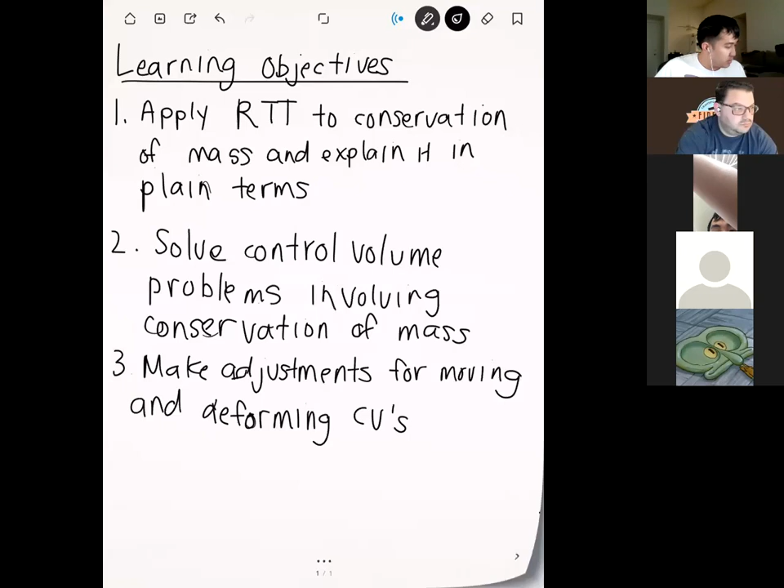This is control volume analysis part 1. What we're about to embark on right now, I think of as almost the real meat of fluid mechanics, at least the introductory one. Over the next few weeks we'll be spending time doing control volume analysis, and you'll see that we can actually apply this to a lot of really practical problems. Out of everything we cover in this class, this is probably the most practical in a lot of cases because it's flexible, you can apply it to a lot of things, and it's not as limiting as Bernoulli, even though Bernoulli is definitely very strong as well.

After that, we're going to go over what's called differential fluid analysis, where we'll cover a couple topics that form the backbone for more advanced fluid mechanics analysis if you go beyond this class. But we're going to start with control volumes. The whole basis of control volume analysis is the topic we covered last Monday before the midterm, which is Reynolds transport theorem.

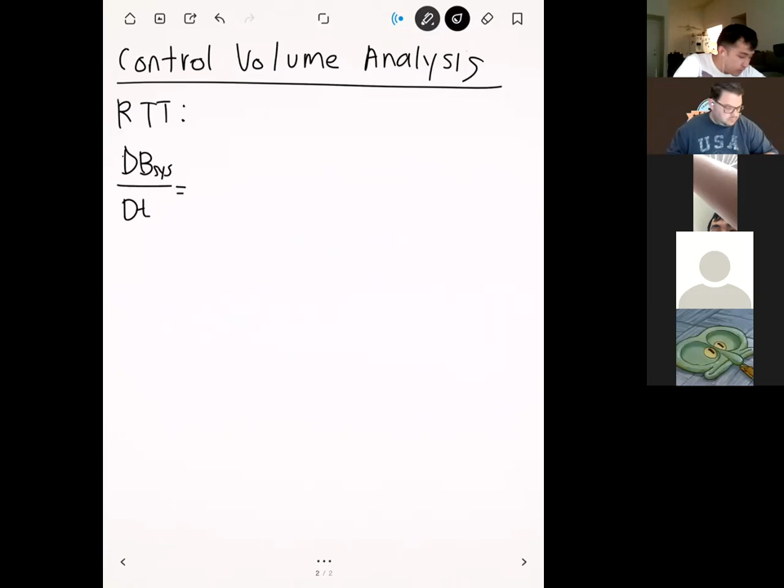If you recall, Reynolds transport theorem, shortened as RTT, is given by this: it relates the rate of change of a quantity within a system to its rate of change within the control volume. So we have dB/dt, and this is equal to the time derivative of the integral of rho little b dV, plus the integral of rho b u dot n-hat dA, over the control volume and control surface respectively. Remember from this expression, big B is our extensive property, and an extensive property is something that depends on the amount of mass in the system.

Little b right here is the corresponding intensive property. The way that we obtain little b is we just take big B and divide it by the mass.

Each of these terms here has a kind of plain language or intuitive definition. This first term right here is the production or generation term. If there's any way for our extensive property to be generated within a system, that's going to be reflected in that term.

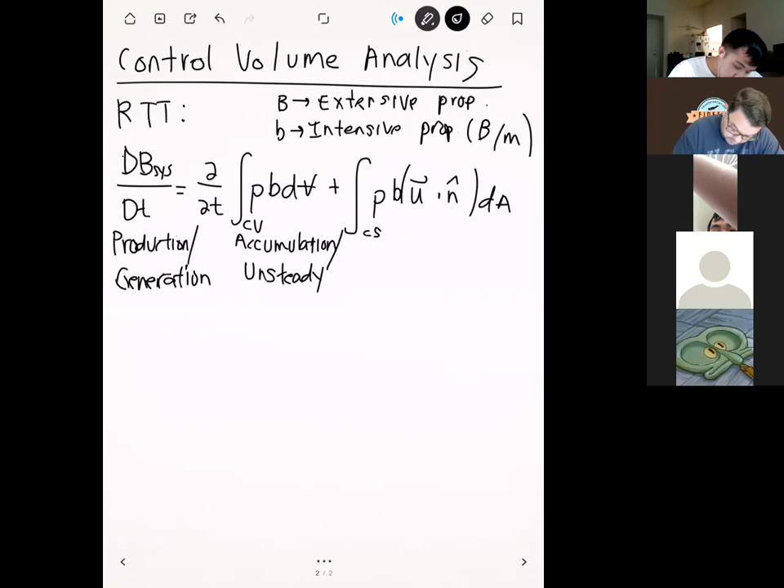The last term right here is our inflow and outflow term. Since our fluid is going to be moving through our control volume, this reflects the fact that our quantity can move with the fluid and it can come into the control volume at an inflow and it can flow out at an outflow too.

The next 4 lectures are basically going to follow the same format. We're going to start with RTT here. This is our most general form of RTT. Then what we're going to be doing is applying this to different extensive quantities.

The list of quantities that we're going to apply this to isn't just a limiting list. You can definitely apply this to a lot of different things, but just for this class, we're just going to go over the big 4 here. We're going to do mass. So that's what we're going to do today.

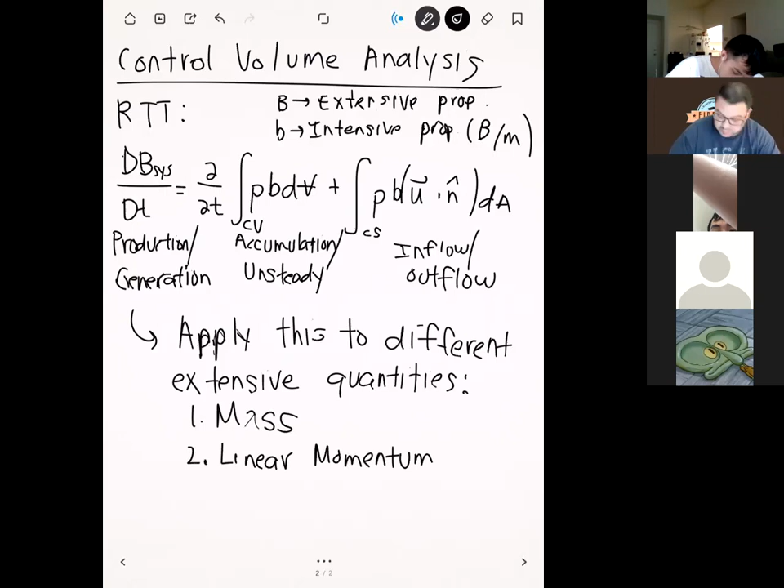Next, on Wednesday, we're going to do linear momentum. Next Monday, we're going to do angular momentum. And then next Wednesday, we're going to do energy.

Today we're just going to introduce the concept of applying RTT, and then we're going to do that same process over and over again. But mass is probably the most important one because it affects just so much. Any questions on this?

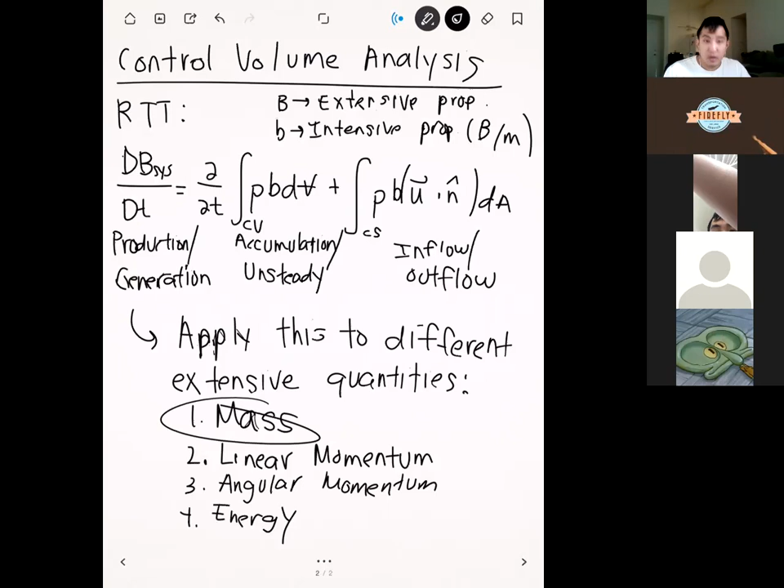Now let's apply RTT to conservation of mass and see how that changes our expression. For conservation of mass, what we're going to do is substitute. We're going to substitute for our B values, specifying them for this analysis.

Big B is just going to be mass. And then little b is just going to be 1. Because remember, little b is just big B divided by mass, and if we have mass divided by mass, then we just get 1.

The first thing that we always evaluate before we write out the full RTT is what does our production term look like? What is our generation term? In this case, our production term looks like this.

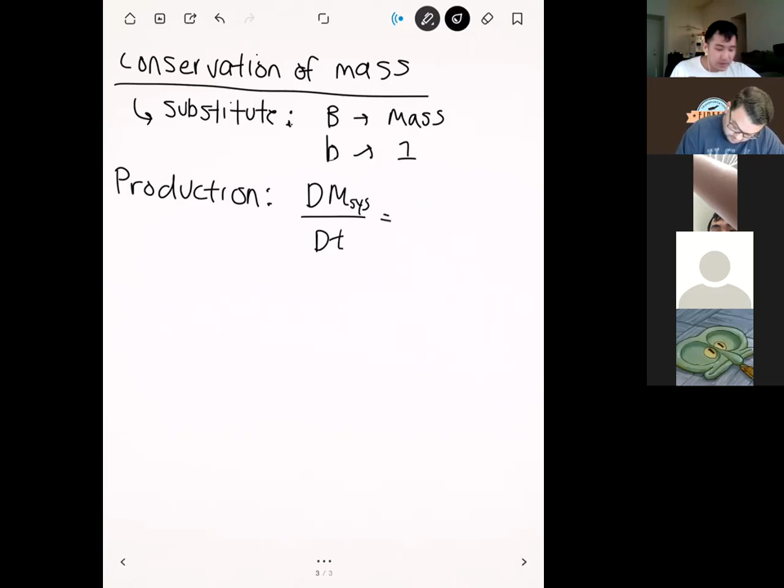If we substitute mass in for big B, we have dm_sys/dt. Just by conservation of mass, we know that if we have a fixed amount of mass, that's what a system is. Remember, a system defines a fixed amount of mass. Within a fixed amount of mass, we can't produce or destroy any mass within that fixed amount of mass.

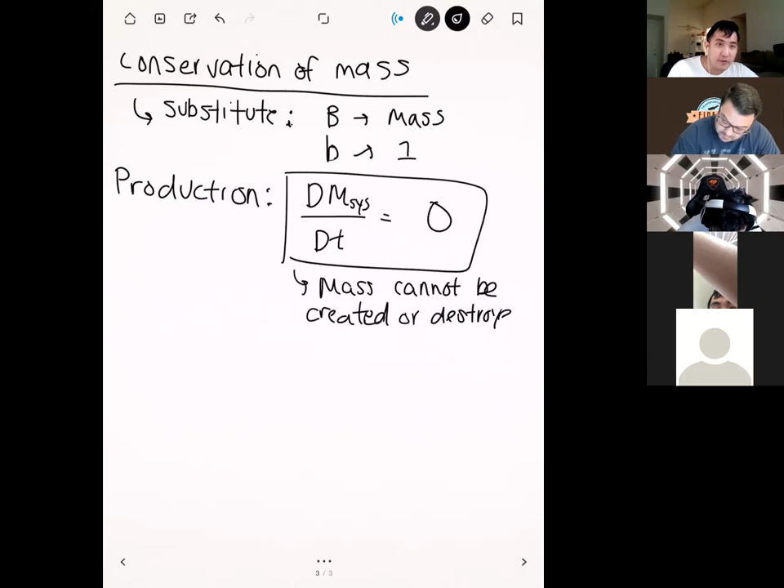So the dm_sys is the fixed amount of mass on the system? Yes, m_sys is the fixed amount of mass on the system. And d/dt is kind of like the rate of change of that mass.

If we apply that, and then we let little b equal 1, then we get the following expression. We get 0, because we just said that this term is 0 right here. Then we have partial derivative with respect to t

of rho dV, plus the control surface integral of rho u dot n dA. And so this right here is RTT for mass.

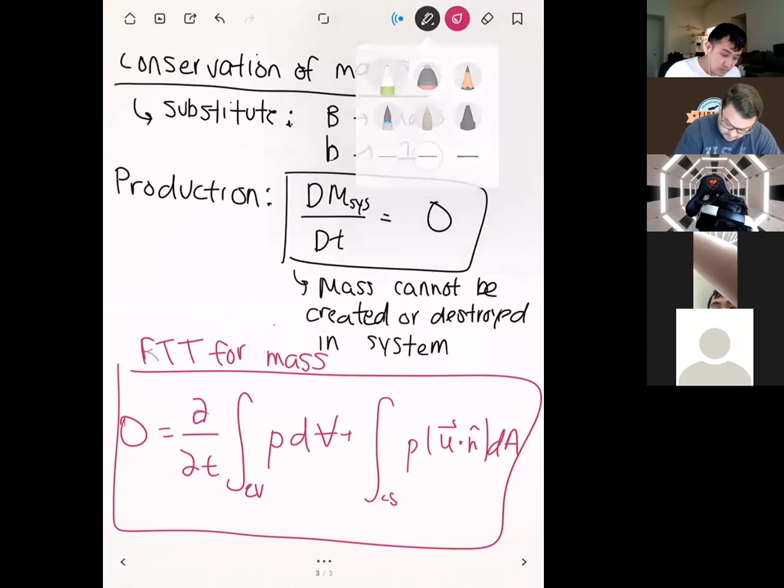Even though we've plugged in for mass here, all the terms have the same interpretation. That first term, our unsteady term, you can think of as the accumulation of mass within our control volume. And the second term is going to be our inflow and outflow of mass into our control volume. Any questions on this?

So that's the formula expression that we're going to start applying to examples. But I think it's also helpful to take that equation and state it in just plain language.

Stated in plain language, basically we can say that the only way for mass to accumulate or decrease within a control volume is for there to be a net inflow or outflow from the control volume.

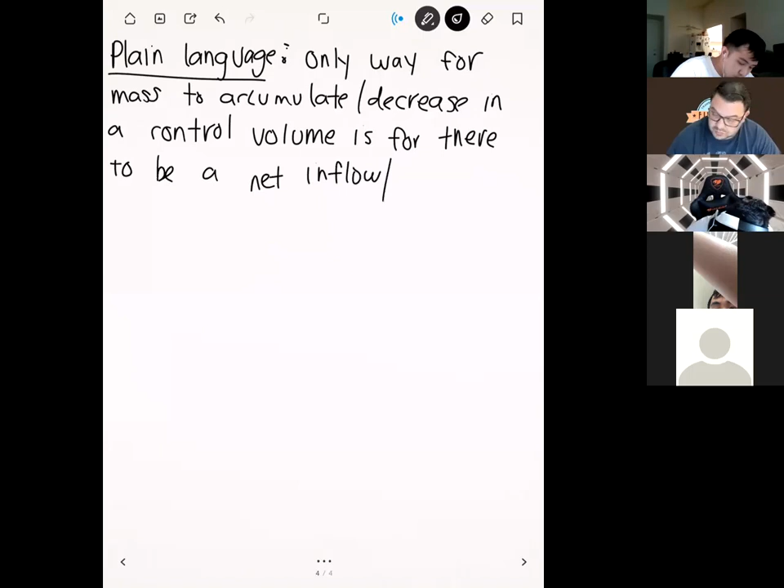Just a quick mental example you can think of: if you have a leaky bucket, the only way for water to accumulate in the bucket is for you to pour water in at a faster rate than water flows out. And by a similar token, the only way for the amount of water in the bucket to decrease is if it's leaking out at a rate faster than what you're putting in, and everything in between.

I know it's a scary integral expression, but that's all this is basically saying: this very intuitive thing that mass can only accumulate if we put it there, and mass can only decrease if we take it away.

So let's demystify some of the terms. First, let's look at the inflow and outflow term. To do that, let's start by recalling something we learned from Bernoulli, which is the expression for mass flow rate.

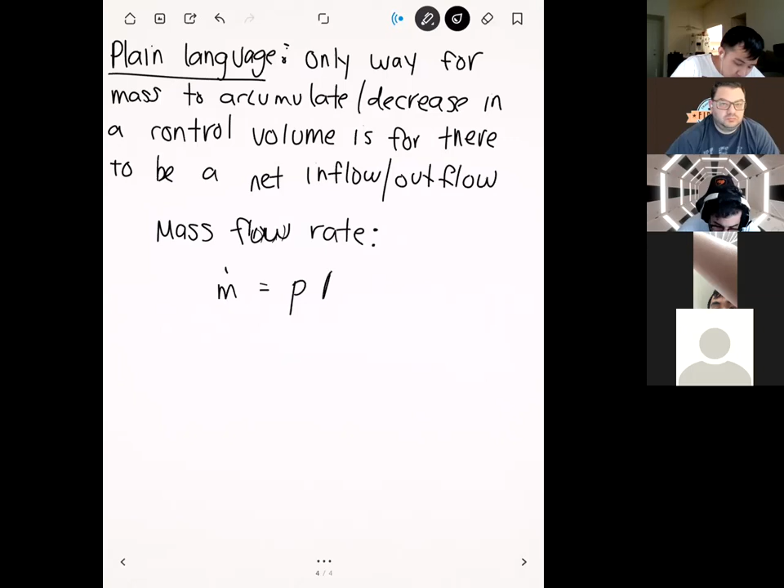Our formula for mass flow rate looked like this: we had an m dot, a rho, an a, and a u. If we go by dimensions, the dimensions for this will be mass over time. So to label these: this rho is our density, this a is area, and this u is velocity.

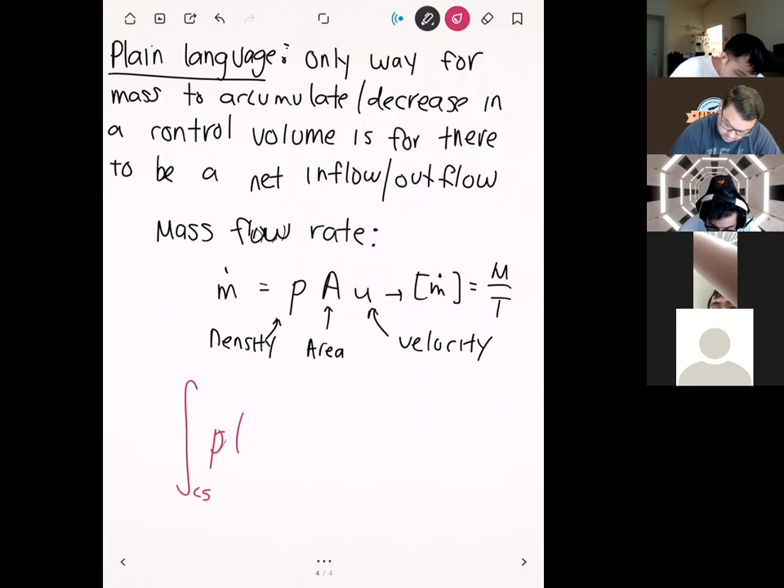If we compare that to our expression here, looking at the inflow and outflow term from RTT, we have the following: the integral over the control surface of density times u dot n dA. You can see from this integral expression we have the exact same terms: we have density, we have area — I know we have dA there, but once we perform that integral, the area just becomes a regular area — and then we also have velocity.

One other thing I want you to remember from last week is how to interpret this expression. Remember, this is a dot product of the velocity and the normal vector to our control volume. So in cases where u dot n... let me do it like this.

In cases when we're evaluating this integral at an inflow — remember, at an inflow velocity is going into our control volume, and our normal vector is pointing the opposite way — so at an inflow, we're going to make sure this is a negative quantity. Inflows have a negative velocity because the velocity vector and the normal vector point in opposite directions.

And then the opposite is true for outflows, where you have flow leaving your control volume, and your normal vector is pointing in the same direction. When you have those two vectors parallel with each other, this quantity u dot n is going to be greater than 0.

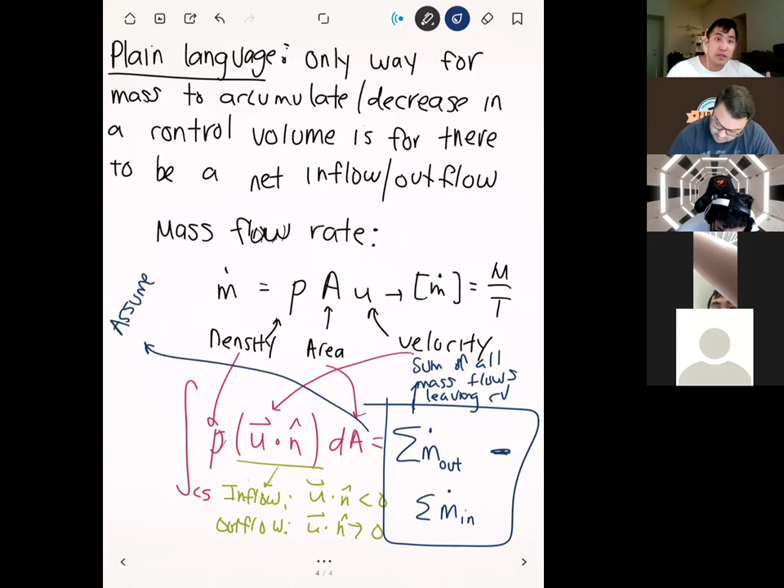I'll draw a picture to kind of illustrate what that exactly means on the next page. Before I do that, are there any questions on this page here? Okay.

So what do I mean when I say that the velocity is constant across the area? Let's just take a usual pipe flow. We have flow in a pipe, so we have fluid that's coming in through here. When I say that the velocity is constant, if we draw all the velocity vectors across this pipe, they're all going to be the same.

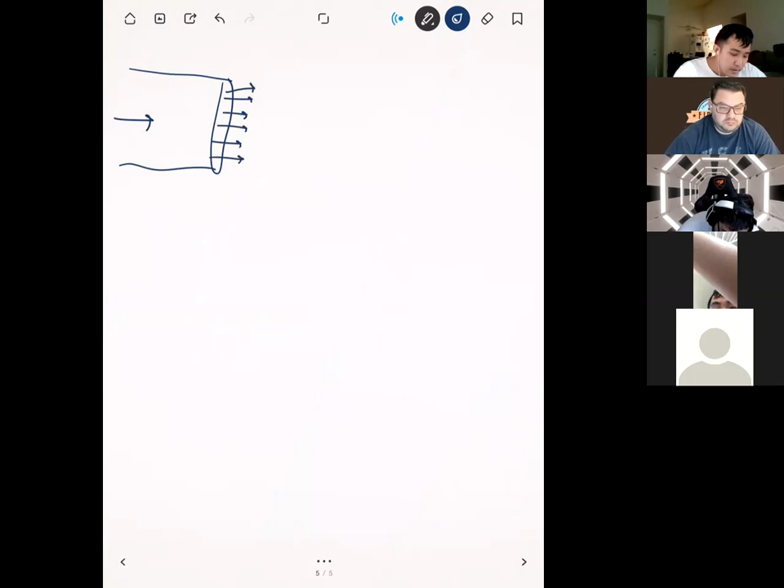And so when we evaluate this integral, we say that this is like u out. Most of the time we assume that the fluid has a constant density, so we can pull this guy out because it's incompressible. And since our velocity is also constant, equal to u out, we can also pull that out of the integral.

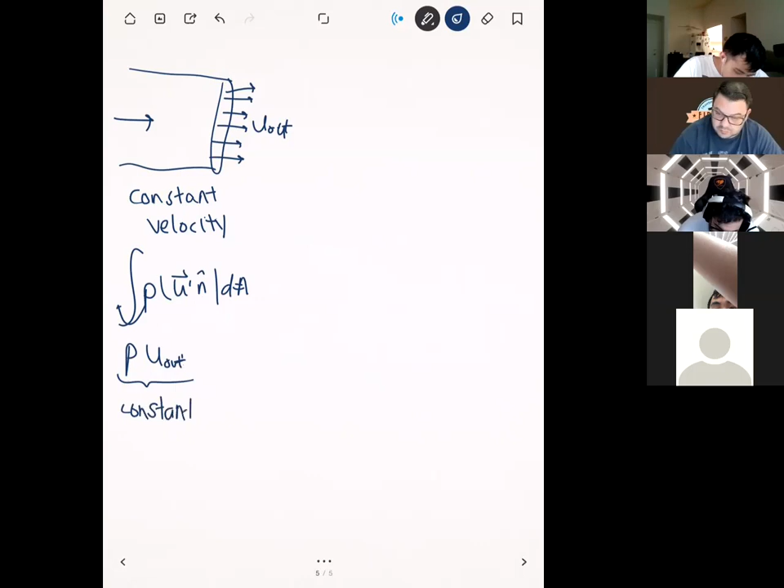Then all we're left with is just the integral of dA. When we simply integrate dA, we just get the area. And then we take the product of density times velocity times area, and we get m dot.

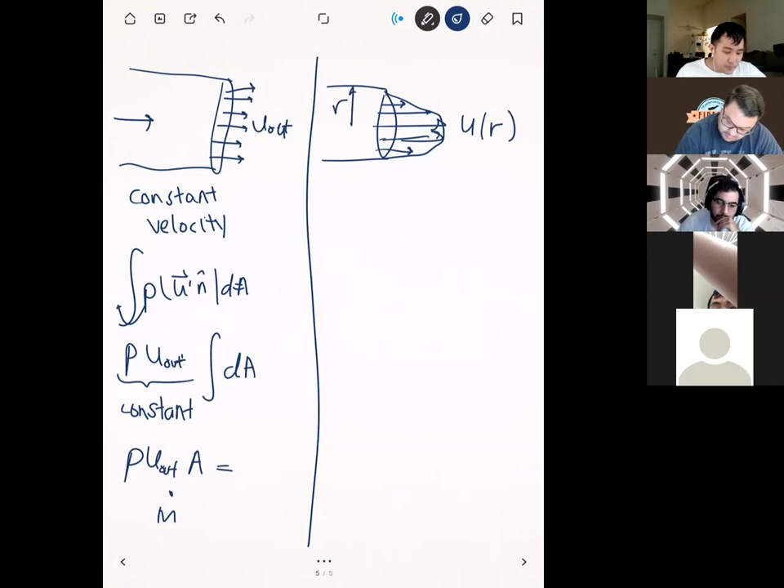We'll see this in a few weeks, but for right now we're not going to worry about it. But just for completeness, or if you're thinking about using this analysis for a real problem and you come across something like this, we're probably not going to use it in this class, but if you come across a situation like this, you can compute an average velocity.

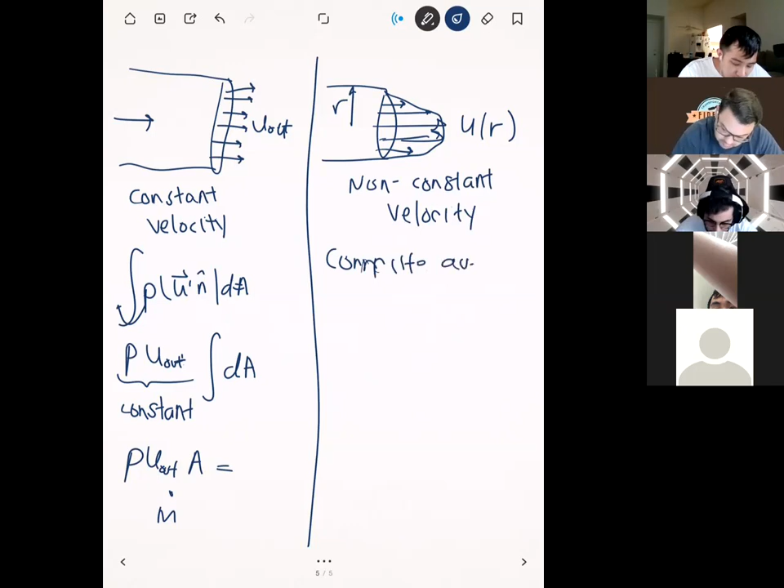So if you have a velocity, we call this a velocity profile, because it shows basically how the velocity in the fluid changes as a function of space. So if you're given a velocity profile, the way that you can compute an average velocity is you simply integrate it, and then divide by density times area. The average velocity, which we'll give the symbol u with a flat hat over its head, is equal to the integral of rho u dot n dA, divided by rho times A.

For this we're basically leveraging the average value theorem, or the midpoint theorem, from calculus. So we basically just integrate our entire expression, and divide by the scalar quantities we're not finding the average values for. In this case we're integrating velocity, density, and area, and then if we divide by density and area, we get the average velocity.

Again, for this class we're probably not going to use this all too much, at least not for 2.5 weeks. But I just wanted to show you guys how to deal with these kinds of problems in case you wanted to apply this to something you're working on for senior design or something else. Any questions on this?

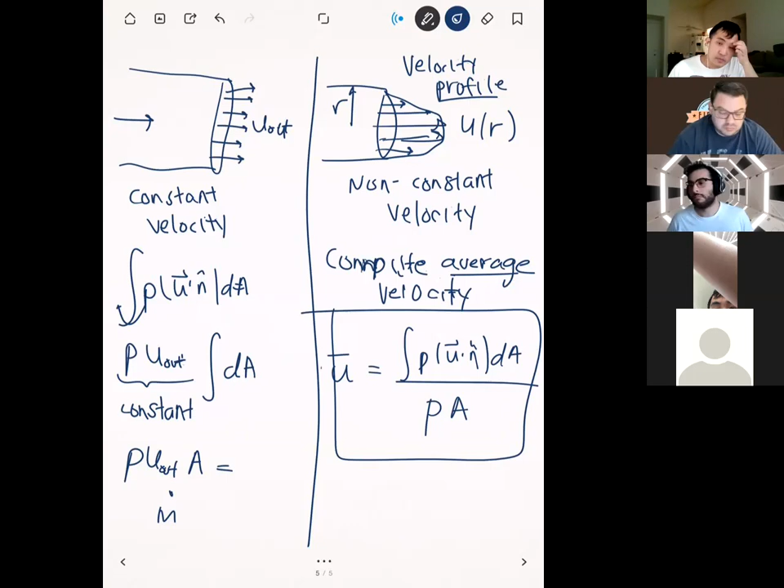Okay, so let's do some examples just to see how this works in reality. We're going to go over three classes of problems. The first thing we're going to do is go over examples where the control volume is fixed and doesn't deform. Then we'll do moving control volume problems, and if we have time, we'll go over problems where the control volume is actually deforming. So let's start with fixed control volume problems.

Okay, so in this example, let's say that we're designing the HVAC system for a confined space. Let's say you work for a workshop that does a lot of painting, like painting for metals or something like that. If you've ever worked with industrial strength paints before in a clean room, it's very important for air to be constantly circulating so that the paint particles don't float around and poison everyone. So for these kinds of systems, it's really important for air to be constantly circulating.

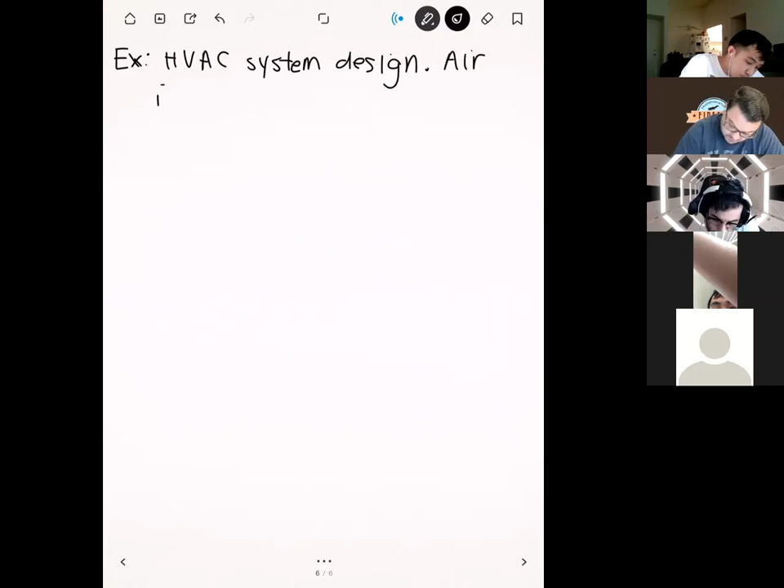So for this problem, let's say that the air within this room has to be completely replaced every 3 minutes. Okay, so that's our time window.

And so what we're going to need to do is find out how much air we need to pump into this room in order to satisfy this safety requirement. Let's assume our room is rectangular, like a box, just so we can compute the volume really easily.

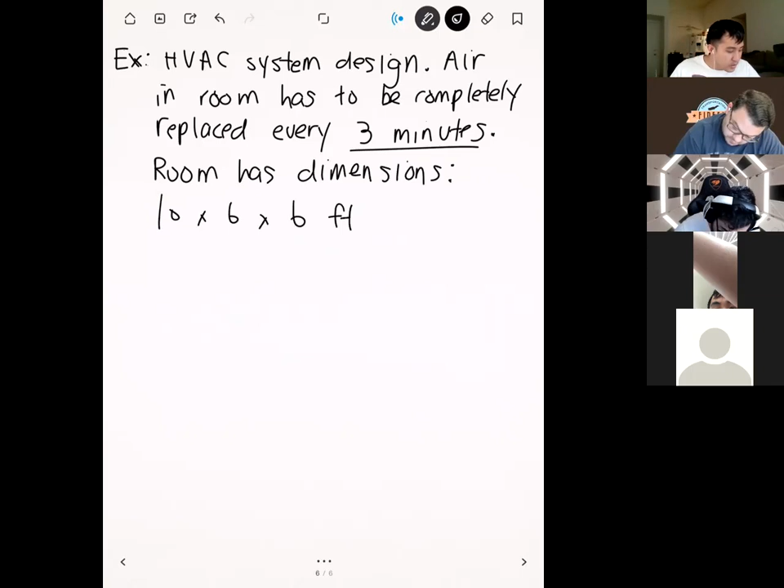Let's say that the dimensions of the room are 10 by 6 by 6 feet. So it's kind of a tiny room.

Okay, so let's draw a figure. Here's our room, and there's our person inside that we don't want to be poisoned.

And so to ventilate this room, let's say that we just have a single inlet and single outlet. Here we're going to have an inflow of air, so we have m dot in, and out here we're going to have an outflow, so we have m dot out.

Okay, and so we know the dimensions of these ports. Let's say that this is a cylindrical pipe right here, and it has a diameter of 8 inches. And at the outlet, we have a diameter of 4 inches.

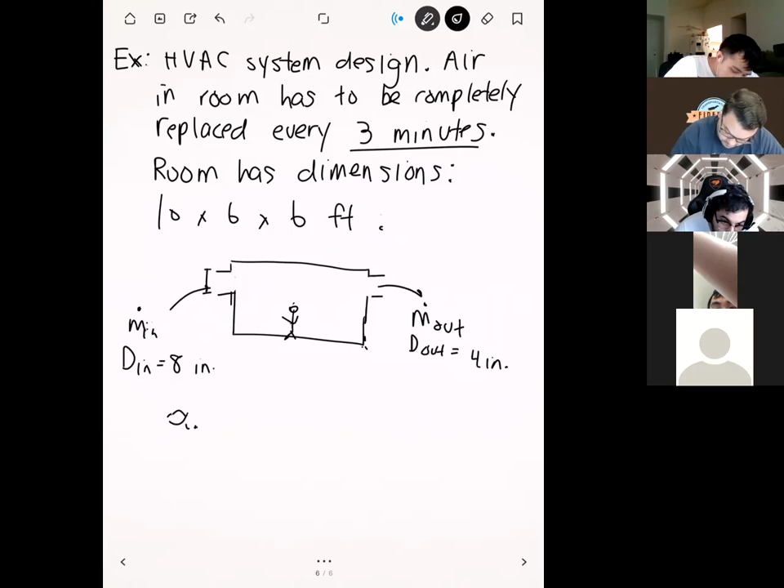And so we want to compute a couple things. First, let's solve for the volumetric flow rate of air. And the units we want to express this in are feet cubed per second.

And then next, let's compute the velocity, the air velocity at the inlets and the outlets. Okay, so that's our problem setup.

And so, before we do anything in these kinds of problems, the first thing we always need to do is draw our control volume. Remember, we went over a couple guidelines for that at the end of last class. But one other important thing that was implied, but maybe I should say explicitly: for this particular problem, we want to make sure that our control volume encompasses everything we want to analyze. For this problem, it's not too bad, because we have a room defined by a rectangular box, so all we have to do is make sure our control volume goes around our entire box.

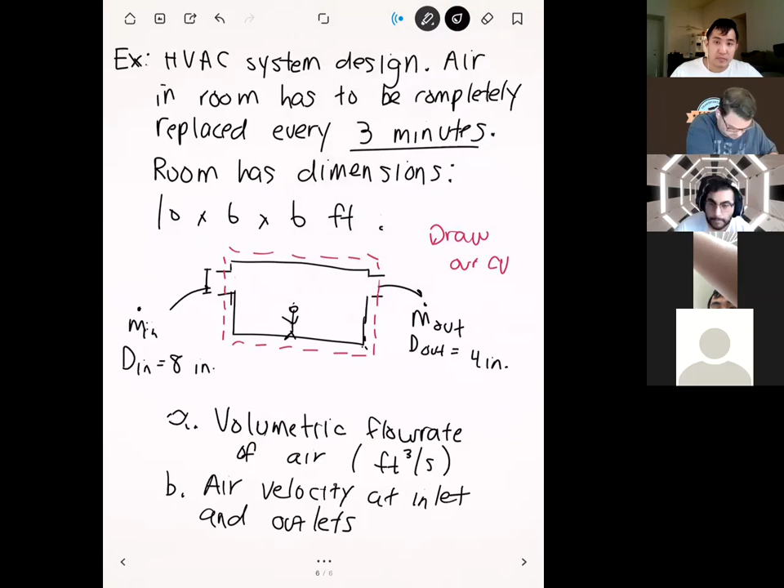Okay, so let's first compute the flow rate of air. First, let's compute the volume. The reason I use this symbol V with a cross through it to denote volume is just so it doesn't get confused with velocity. Usually volume in the text you'll see as a capital V, but when your writing is messy, it's hard to tell the difference between a capital V and a tiny v, so I do V with the cross on it.

And so the volume here is pretty simple. We're just going to take all the dimensions of our box and multiply them with each other. So you have 10 feet by 6 feet by 6 feet. We multiply all that together, we get 360 feet cubed.

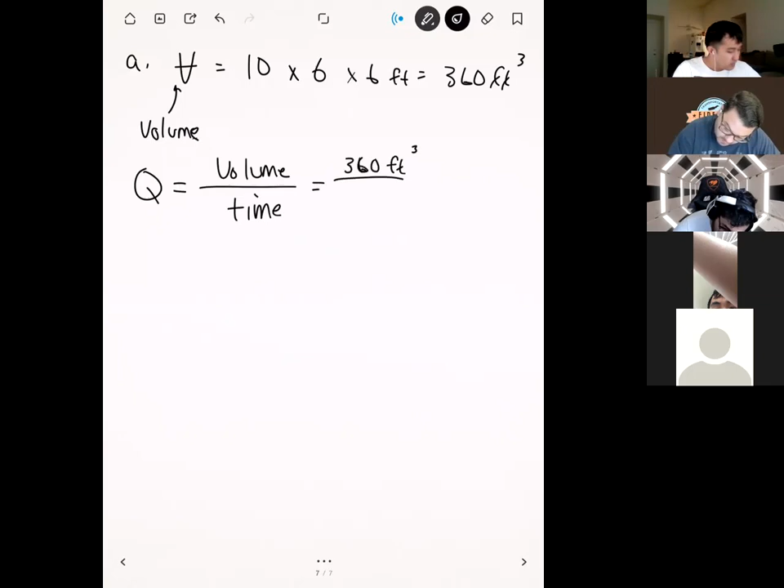Okay, so the volumetric flow rate. Remember what we said was that the air in this room has to be completely replaced every 3 minutes. So what that means is we have to put in a volume of air equal to the volume of the room every 3 minutes. Let's take the volume of the room, which is 360 feet cubed, and divide it by the amount of time we need to replace all this air, which is 3 minutes, or 180 seconds. Doing this division, we get 2 feet cubed per second. So when we're selecting a pump, or designing our HVAC system, we need to make sure that the flow rate of air going into the room and coming out of the room is at least 2 feet cubed per second, just to satisfy the safety guidelines.

Okay. Any questions on that?

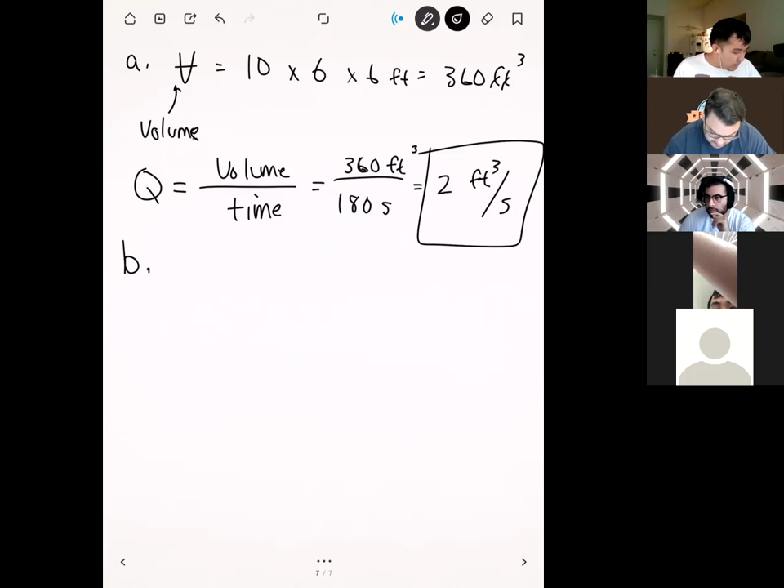So for this first part of the problem, we didn't have to apply RTT yet. We basically just used the parameters of the problem and went from there. But to solve for the average velocities, we're going to apply RTT. Let's go ahead and write down every single term. The way I want you guys to do these problems, even once you get practice, you can see from the beginning what terms will cancel out or not. But when we're starting out, I want you to write out the entire expression. You don't have to go from general RTT, but at least go from the place where we've already applied the big B and little b. Write out the entire expression and then cancel out terms from there, just so you don't miss anything, because sometimes it's easy to miss terms if you're not careful.

Okay, so there's our entire expression, and all this is equal to 0, because mass can't be created or destroyed. So the first thing we'll do is cross out the accumulation term. Just because it wasn't explicitly said in the problem, but we know that since this is something we're designing for a long amount of time, this HVAC system has to be running all the time and always has to be replacing the air. We can say this situation is steady, and we can cross out that first term. Anytime you have a steady situation, we can cross out that term, because we know no mass is accumulating in the system, therefore nothing is really changing with time.

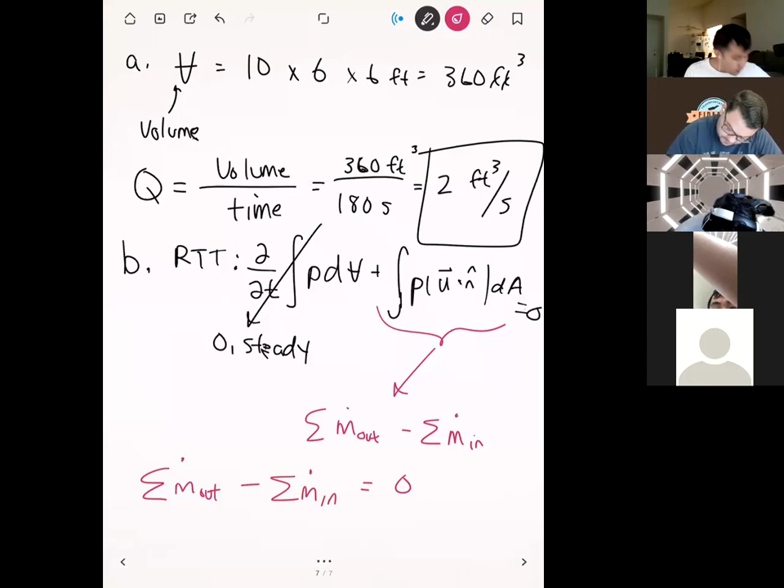From here, we can write our inflow outflow term into a form that's more convenient. So we can say it's equal to the mass flow in, which is equal to the mass flow out. If we rewrite this expression, we get m dot out minus sum of m dot flow in is equal to 0. In this case, we only have one outflow and one inflow, so let's replace these with their full expression. Sum of m dot out is simply density multiplied by u out times a out. And m dot in is rho, density rho, times u in, velocity in, times a in.

Any questions on this before I turn the page?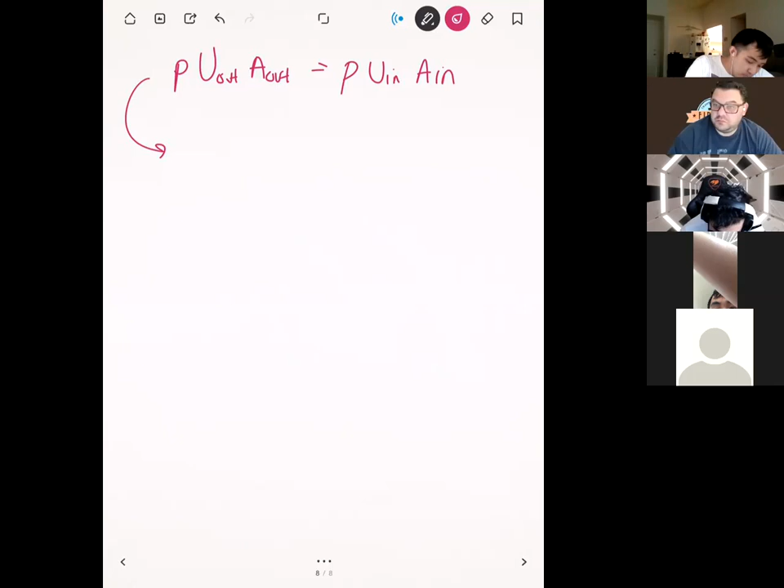At this point, we can simplify that expression. If we simplify this, we get rho, we just move it to one side, u out, a out is equal to rho, u in, a in. This actually gives us a really nice result, which tells us that when our situation is steady, like we have right here, then the amount of outflow has to equal the amount of inflow. So any air that we put into the system has to come out somehow.

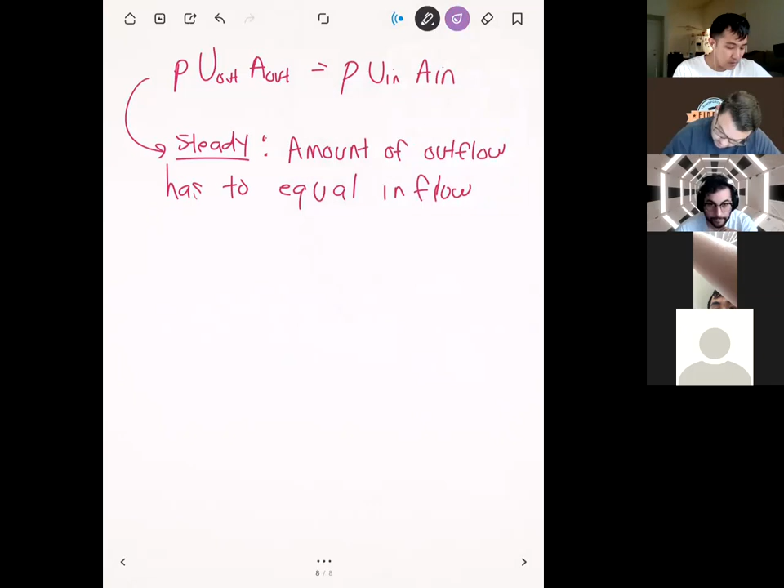And then what we can do from here is we can take the density and cross those out, because we have the same density on both sides, and we assume the flow is incompressible. And we get that u_out, A_out is equal to u_in, A_in. And then we know from our Bernoulli unit that the product of velocity and area is equal to Q, our volumetric flow rate.

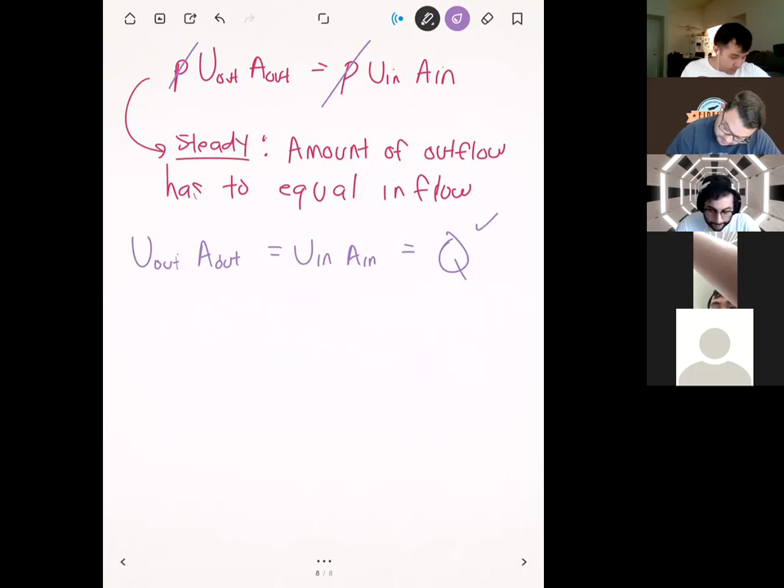And Q we've already solved for in this problem just from part A. Remember, part B of this problem asks to solve for the velocities at the outlet and the inlet. So let's use the fact that we know Q, and we can compute the areas because we're given the diameters of the two ducts, and then we can solve for u_out and u_in.

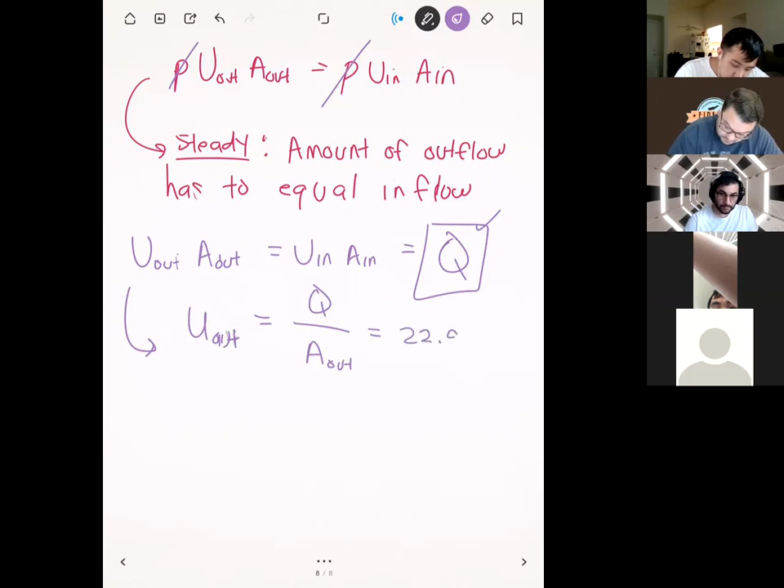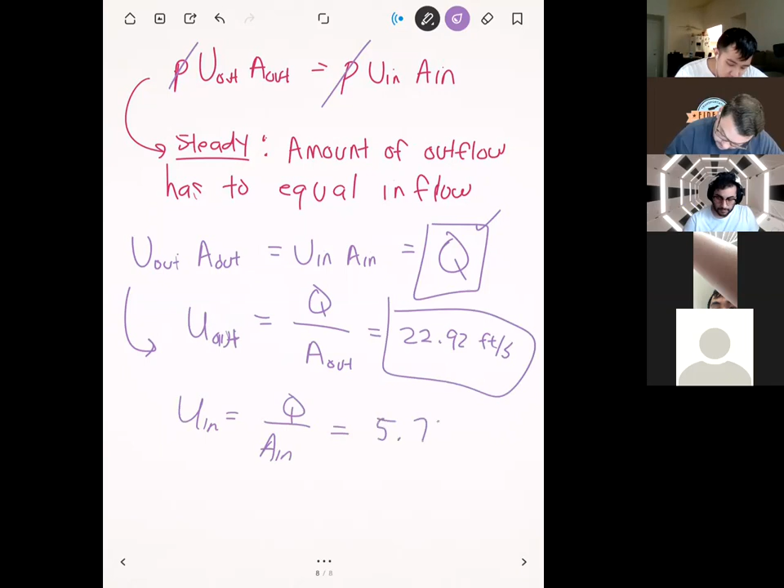So let's say we solve this expression for u_out, so u_out is going to be Q divided by A_out. If we compute the area and perform this division, we get 22.92 feet per second, so that's the outlet velocity. And then the inlet velocity is going to be Q divided by A_in, which is 5.73 feet per second.

So we can see here that the outlet velocity is significantly higher than the inlet one, and that's because our outlet pipe has a much smaller diameter, so velocity has to increase in order to maintain the same mass flow.

The reason we start with conservation of mass here is that we've already been talking about this a bit through Bernoulli. The RTT expression for conservation of mass a lot of times just breaks down to what we learned in Bernoulli, where mass flow in has to equal mass flow out. The only difference now is that we're working with a more general expression where we can deal with multiple inlets, multiple outlets, and actually unsteady situations, which is the next example.

All right, any questions on this?

So you're doing the area of our outlet stuff, are you taking like a cross sectional type area of that, like pi over 4 times d squared or something like that? Yes. So the area is always going to be whatever is the cross section for the flow, whatever area is perpendicular to the flow direction. You can kind of think of it as the area that the flow must cross in order to enter the control volume.

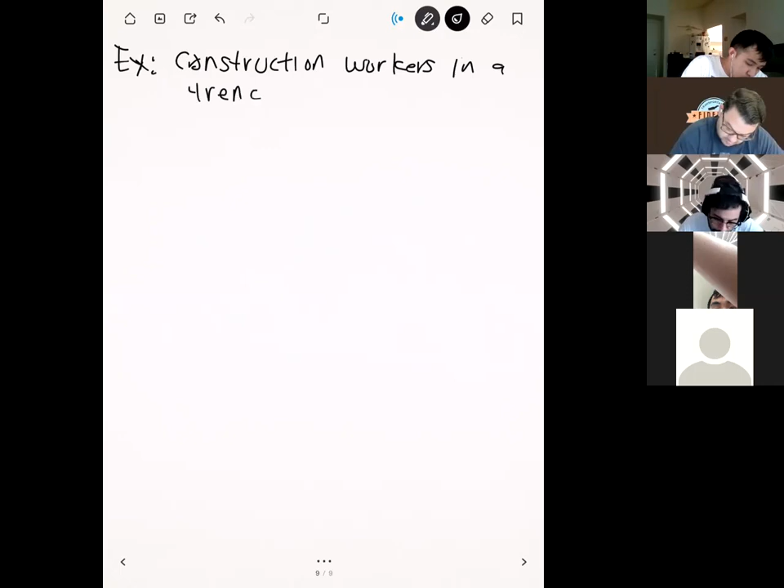So let's say that we have our trench that looks like this. We have our construction worker. I'll give him a hard hat because he's a construction worker. Let me make it orange.

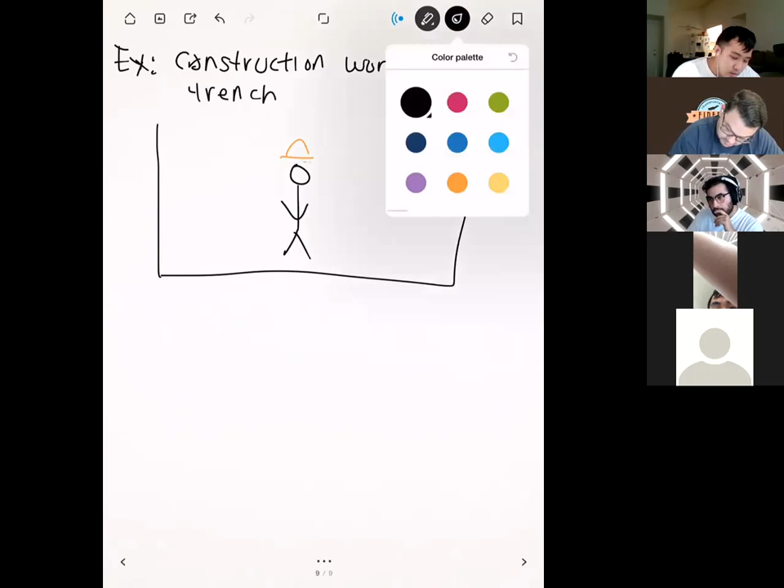There we go, for safety. So what tends to happen for these trenches that run alongside the road is that, because cars are constantly driving past, they're emitting a lot of stuff, but the main thing they're emitting is CO2, carbon dioxide that's constantly coming out of cars. And since CO2 is more dense than air, and we know from hydrostatics that a more dense fluid tends to sink, you constantly have this inflow of CO2 coming into the trench, just like this.

So what's done in a lot of practical cases, you might have seen these before, is that there's a hose that's actually inside the trench, that might look something like that. A lot of times these hoses aren't putting anything into the trench, what they're doing is actually sucking things out of the trench, sucking out the CO2 or other harmful gases that are in that trench, just to keep the workers in relatively good condition.

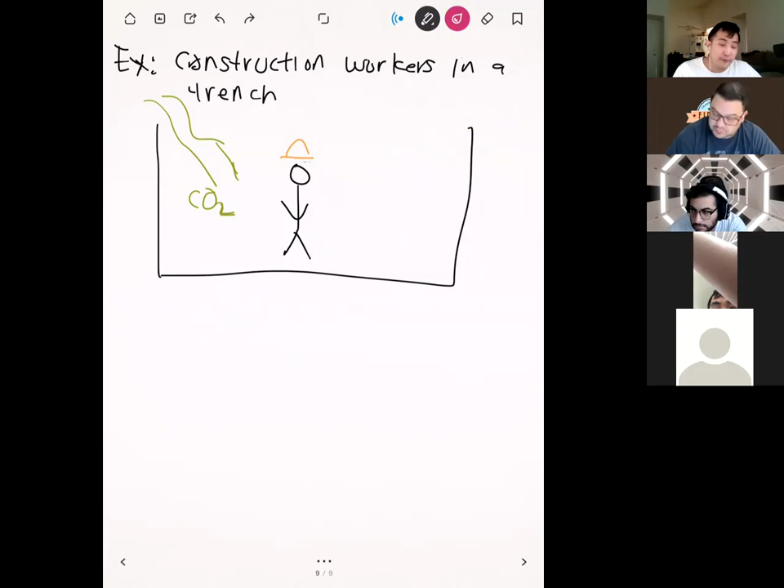But in this problem, we're going to pretend that we don't have the hose, so we have a very unsafe situation, and we want to find out at what point things are going to become unsafe for our worker. So just like before, let's draw our control volume. So our control volume will look something like this, it's just going to surround the trench.

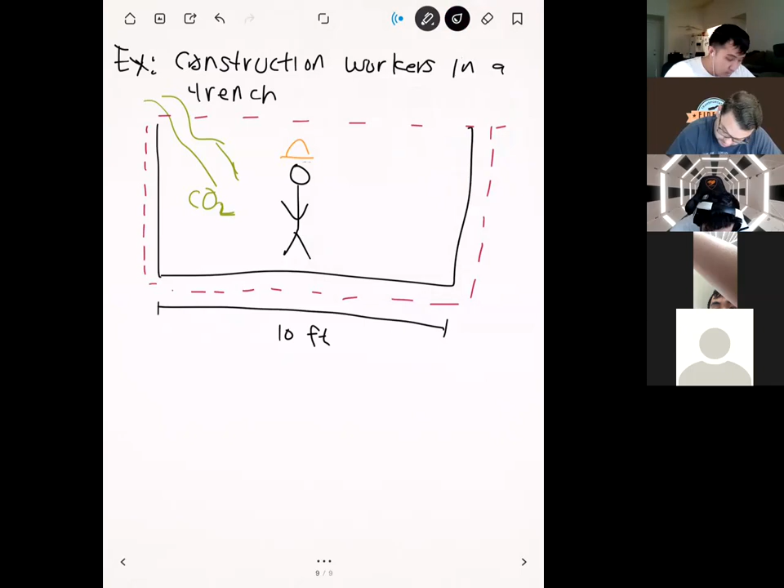Okay, let's give our trench some dimensions. Let's say this length right here is 10 feet, this dimension right here is 8 feet, and we'll also say it has a depth of 5 feet going into the page.

Let's solve for the following quantities. First, let's solve for the rate at which CO2 is entering the trench, or the rate at which the height of CO2 in the trench changes with time.

And in part B, the time it takes for the height of the CO2 to reach 6 feet.

The reason that number is significant is that it's kind of the average height of construction workers. This is important to know because, if you don't have proper ventilation, this is the amount of time workers can work in the trench before they have to circulate all the air out of there.

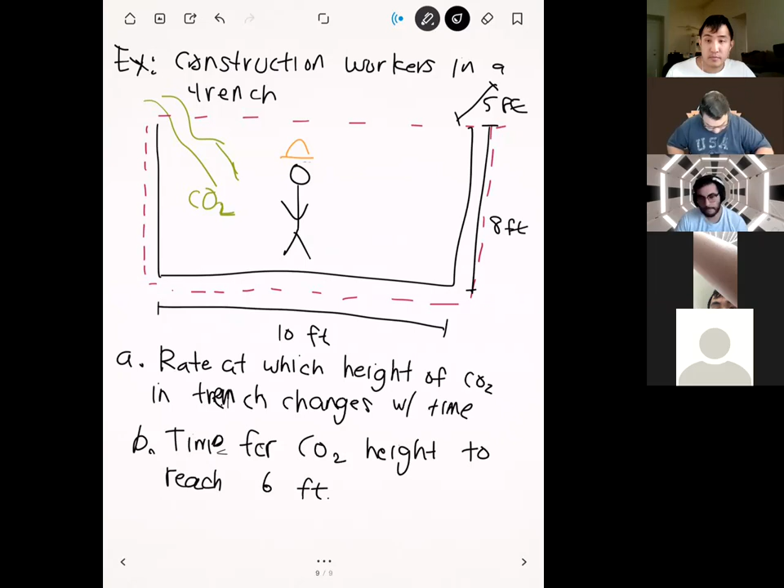Any questions on the problem setup? Okay, all right, so let's start with part A. We want to find out the rate at which the height of CO2 is changing within the trench. So let's apply RTT.

We're going to write out the entire expression. So we have 0 is equal to partial t of the integral of rho dV, plus the integral of rho u dot n dA.

Oh, I forgot to give one more thing for the problem. We need to know the actual inflow of CO2 into the trench. So let's say that Q in is going to be 10 feet cubed per minute.

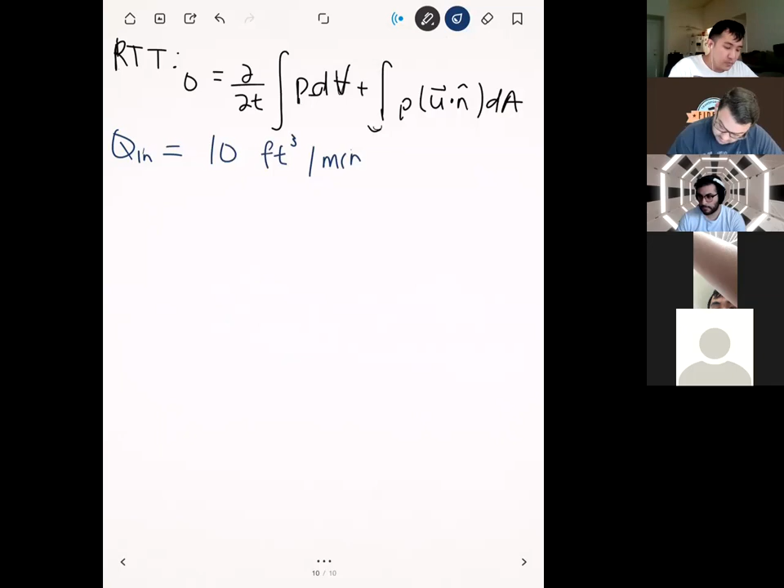And so in this particular problem, since we're saying that CO2 is accumulating within the control volume—let's assume we start with no CO2 in the trench, and over time CO2 enters and accumulates—since we have this accumulation, we need to keep this term right here.

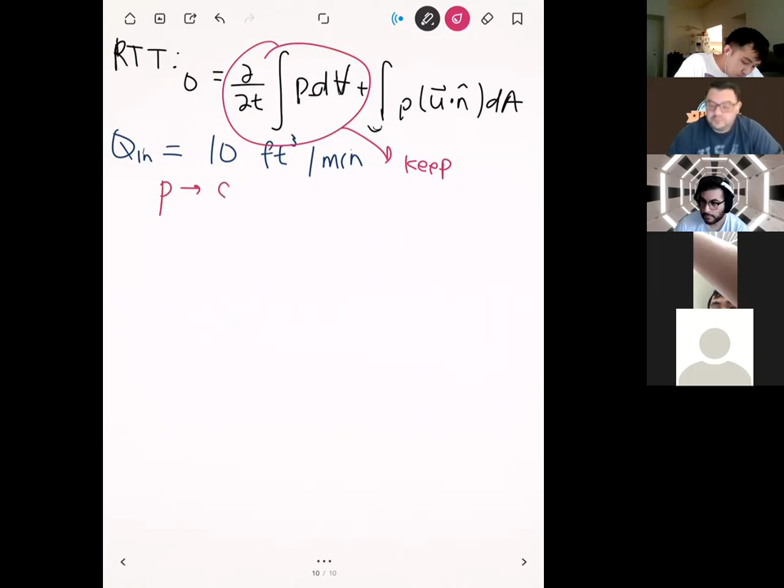Let's rewrite this expression and simplify it a little bit. First we'll apply our usual assumption that the density is constant. So if we have a constant density, we can pull it out of the integrals, and we get 0 is equal to rho partial t of the integral of dV.

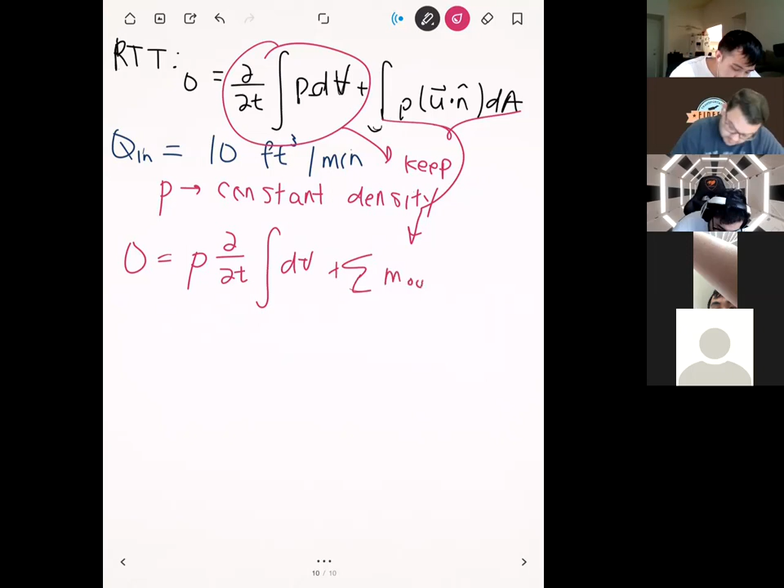Then let's replace this expression with the one we know in terms of mass flows. So we're going to have the sum of all the mass flows out minus the sum of all the mass flows in.

First we'll cancel out the outflow term, because we're saying the CO2 is just accumulating within the control volume, so there's no hose sucking the CO2 out.

If we evaluate this integral, it's just the integral of dV, so that's just the volume. If we apply the time derivative of that, we simply get 0 is equal to rho dV/dt minus m dot in. So we just have one inflow in this case, and our inflow is given by this volumetric flow rate, so it's density times Q in.

Next we're going to cancel out the densities, because density is constant, so we can just pull it out and subtract. We get dV/dt is equal to Q in. So what we're saying is that the rate at which the volume of CO2 is changing within the control volume is equal to the rate at which CO2 is entering the control volume. Intuitively, that makes a lot of sense.

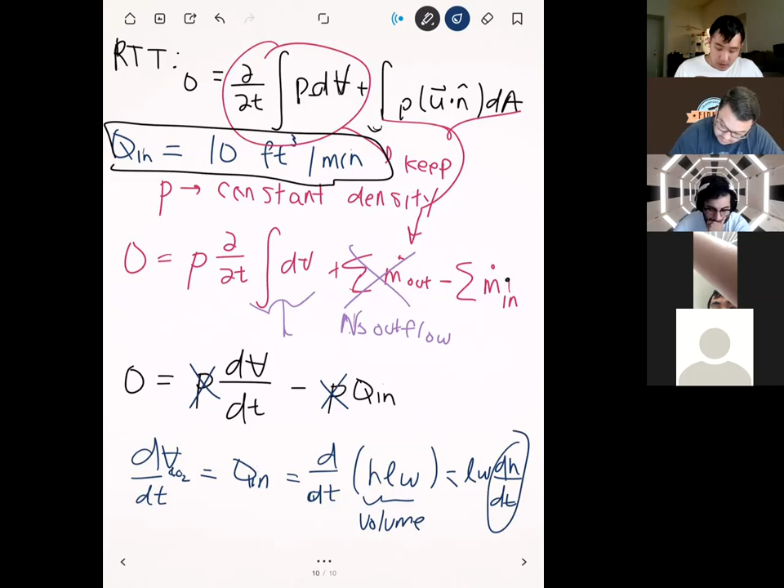Okay, so if we solve this expression for dH/dt, we get dH/dt is equal to Q in divided by the length and the width.

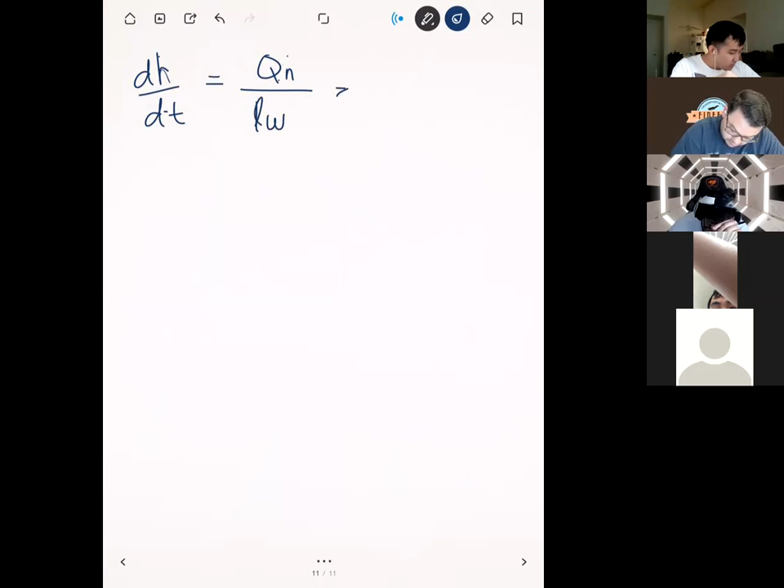And so if we plug in all the numbers, because we have all of them from the problem, we get 0.2 feet per minute.

So if we dig this trench in the middle of the night, when no cars are running, and then as soon as cars start driving past, the height of CO2 in that trench is going to be raising at 0.2 feet.

And so now that we have the rate at which the height of CO2 is changing within the control volume, we can compute the time. Remember, we want to compute the time it takes for the height of CO2 to reach 6 feet.

All we're going to do is take 6 feet, divide it by the rate. So you have 6 feet divided by 0.2 feet per minute. The feet cancel out, and we get 30 minutes.

So if we start with basically an empty trench, no CO2 in there, and we start building in the dead of the night, then as soon as cars start going past, workers can only work in there 30 minutes before it starts to get really dangerous and they're drowning in CO2, which is obviously not good.

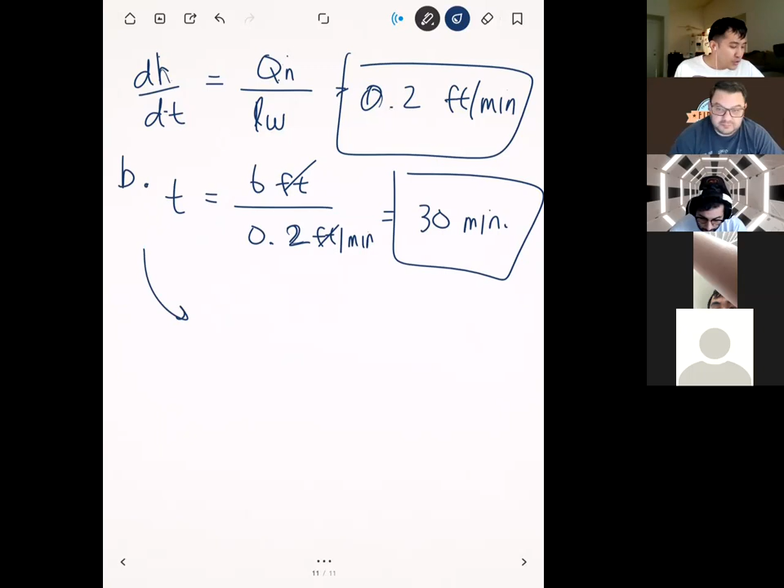The big reason I wanted to do this problem, first of all, was to give you guys a taste of how you do unsteady problems. But also to highlight the general fact that when you have an imbalance of inflows and outflows—and that's exactly what we had in this case—we had an inflow of CO2 but no outflow. We're just putting fluid in, but none of it's coming out.

And so when you have this kind of imbalance, this leads to accumulation. In this case, accumulation of fluid within the control volume, or the opposite can be true, where it can lead to a decrease in fluid.

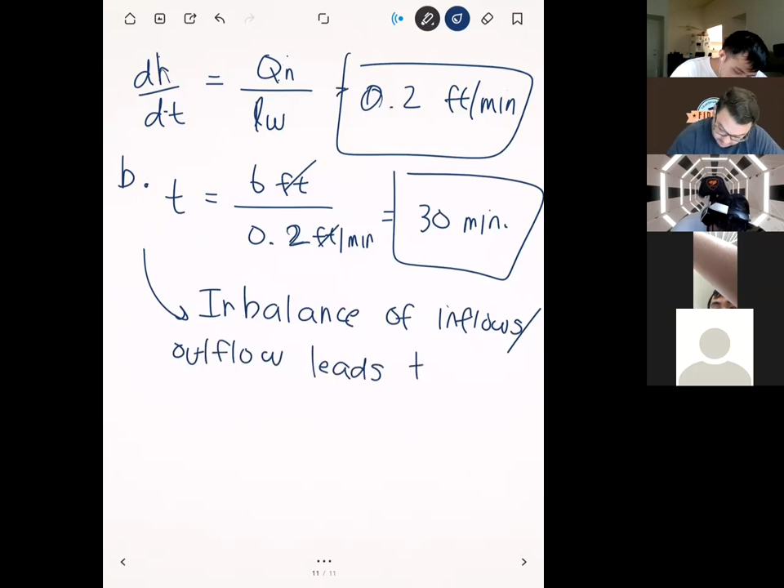Or in other words, the term you'll see most often is that this leads to unsteady situations. An imbalance of inflow and outflow will lead to these unsteady problem-solving situations. So those are two examples: one for a fixed problem, one for a steady problem, one for an unsteady.

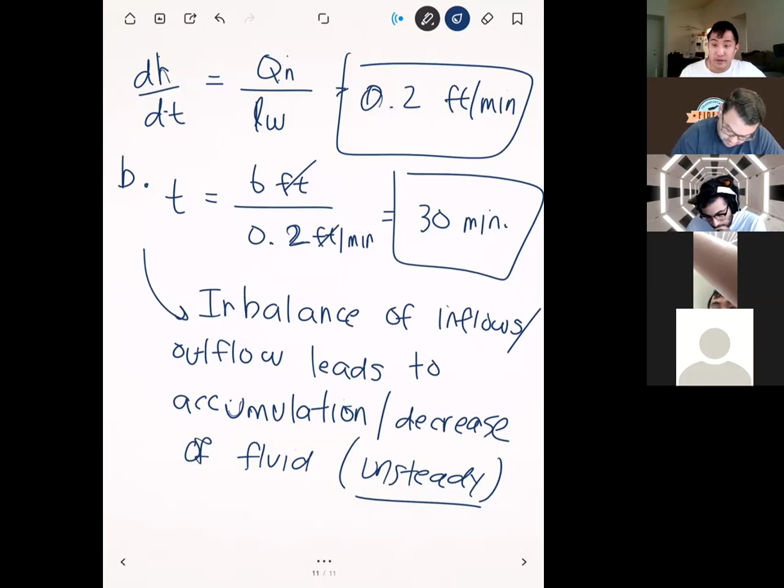Now let's look at problems where the control volume is actually moving. We touched on this briefly at the end of last lecture. There are situations where it's computationally more convenient to have the control volume move, and in these situations, what we need to do is replace our velocity term in the inflow-outflow term with a relative velocity.

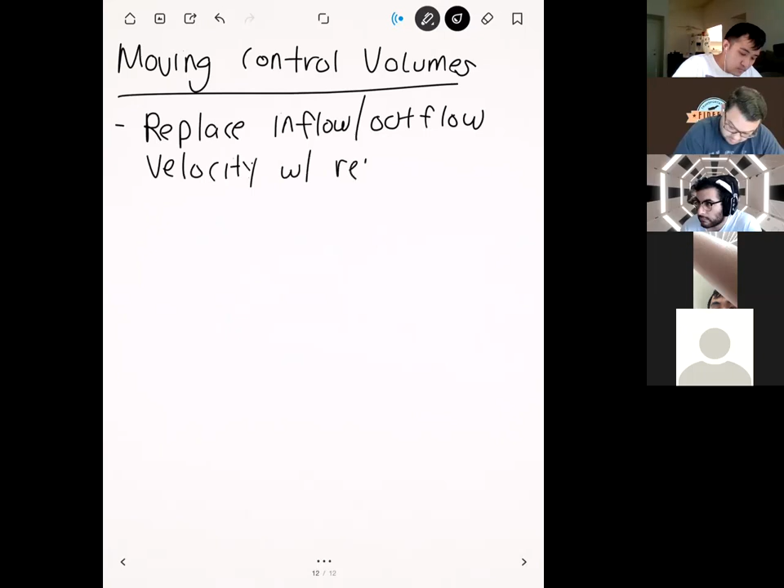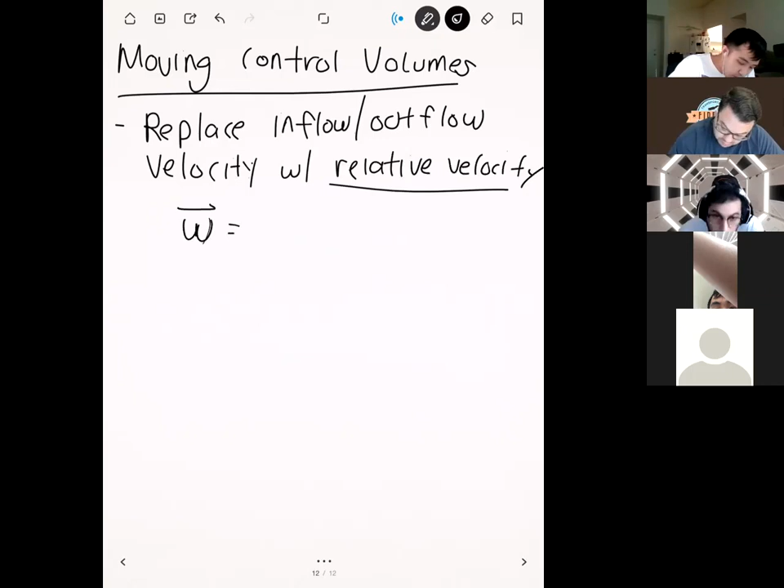Our relative velocity, we'll call this W, so this is going to be U minus VCV, where this is the velocity of the control volume. If we plug that into our expression, we get the following. We can still have our unsteady term unchanged, because we don't have a velocity in there. But what does change is our inflow-outflow term right here.

For our normal stationary control volumes, all we have is just this velocity right here. But when the control volume is moving, we need to take the moving control volume into account, so we have the difference between the fluid velocity and the control velocity—this is our relative velocity. Next we're going to do an example to show you how this is used. Any questions on this page?

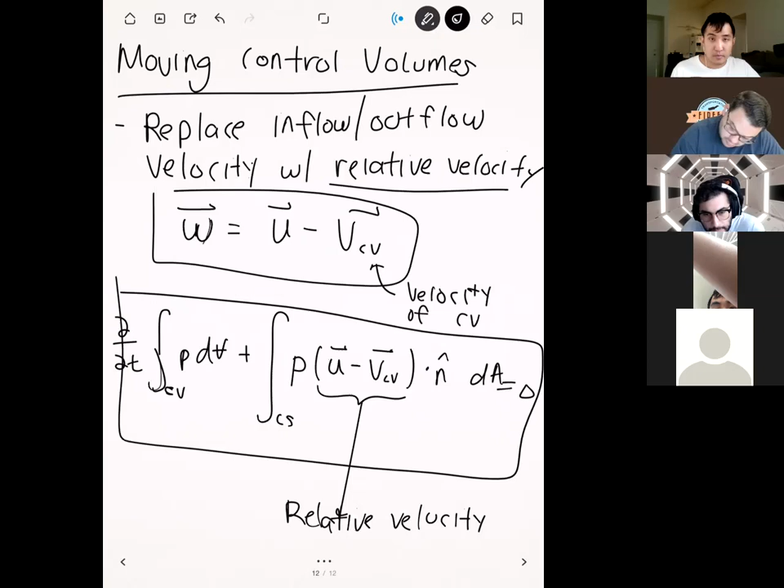Let's do an example. Let's say we have an airplane that's moving forward at a speed of 971 kilometers per hour.

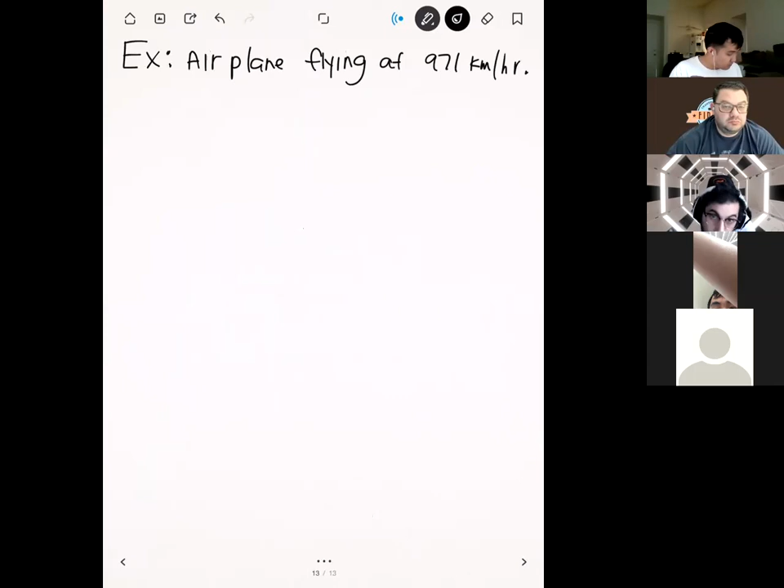What we want to do for this problem is look at the airplane engine. Let's say that an observer on the ground—and the reason I say he's on the ground is because this is a fixed reference frame—somehow, let's say he's Superman, so he can see things really, really far, and his eyesight can perfectly quantify the velocity coming out of a very fast-moving airplane.

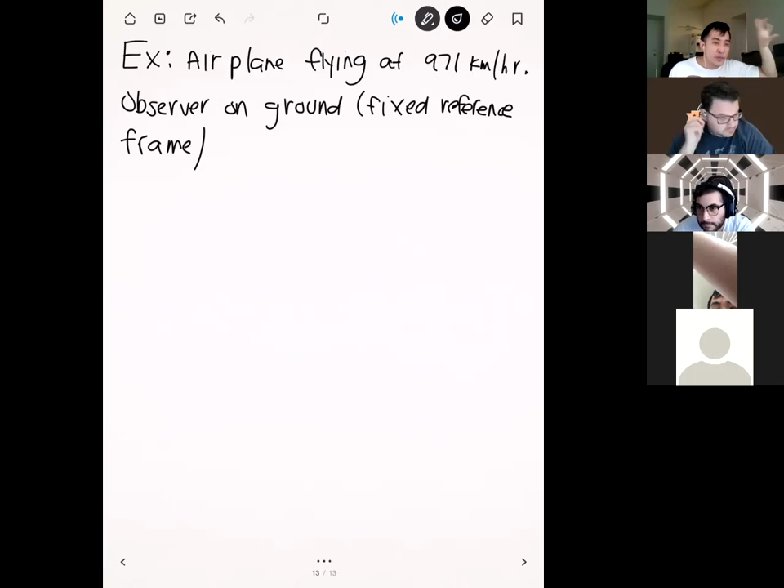So let's just say he has superpowers. Let's say he observes the gas leaving the airplane engine has a velocity of 1,050 kilometers per hour.

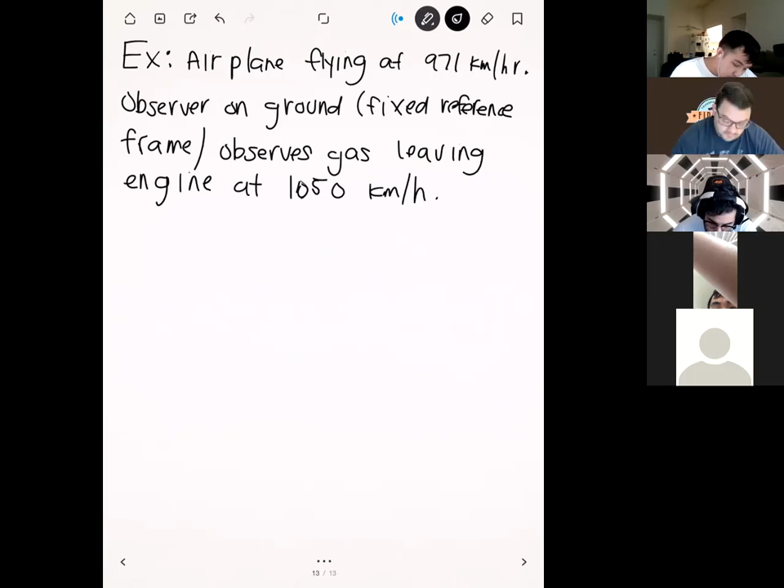Let's draw our control volume here. So here's our airplane engine, and let's say it's moving to the left with a velocity of what's given up here, 971 kilometers per hour.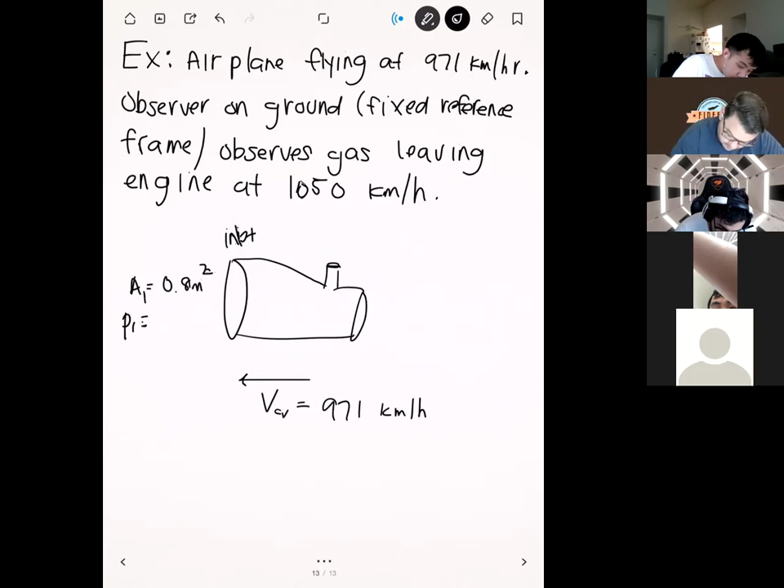In this problem, we're actually going to have a changing density because this airplane's moving so fast, and we're going to see some effects of compressible flow. At the inlet, let's say we have A1 equal to 0.8 meters squared, and we have the density at the intake equal to 0.736 kilograms per meter cubed.

At the outlet, we have the following: A out is going to be 0.558 meters squared, and the density at the outlet is going to be 0.515 kilograms per meter cubed. We know from the problem that the velocity at the outlet, U2, is going to be 1,050 kilometers per hour.

In addition to these, we actually have one more inlet—this is our first introduction to a multi-inlet problem. In addition to the air naturally flowing through the engine, we also have an injection of fuel. The fuel comes in through this little duct right here, and it has a certain mass flow rate.

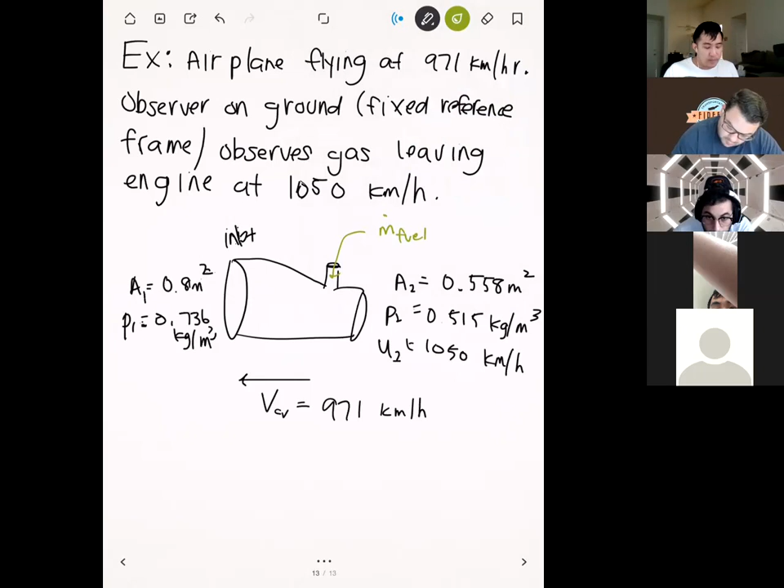In this problem, we're going to use conservation of mass, and since our airplane's moving, we have a moving control volume. What we want to solve for is the mass flow rate of the fuel to satisfy all these conditions.

Okay, and then one other thing, since this airplane is kind of just flying at a constant velocity, we're going to assume that the problem is steady.

Any questions on the problem setup?

Okay, let's start this problem the same way that we started all the other ones. Let's start with Reynolds transport, and let's write out every term here. So we have partial t of integral of rho dv.

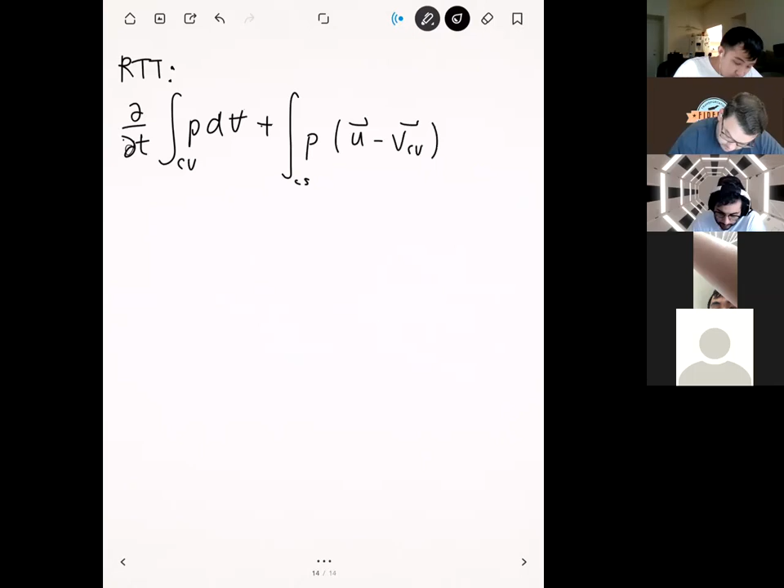Plus our inflow outflow term, so we have rho cs of... remember we have a moving control volume, so we have to take that into account. And all this is equal to 0.

All right, so the first thing we're going to do is cross out the first term right here because we have a steady situation. And if we have a steady situation, then our total mass inflow has to equal our total mass outflow.

So let's rewrite this term like we usually do. This term is just going to be sum of mass flows out minus sum of mass flows in. So if we write this out, we have m dot of the exhaust.

Our exhaust here is our only outlet, so that's the right side of our airplane engine.

From that, we're going to subtract the mass flow rate at the inlet, so that's the conditions at location 1.

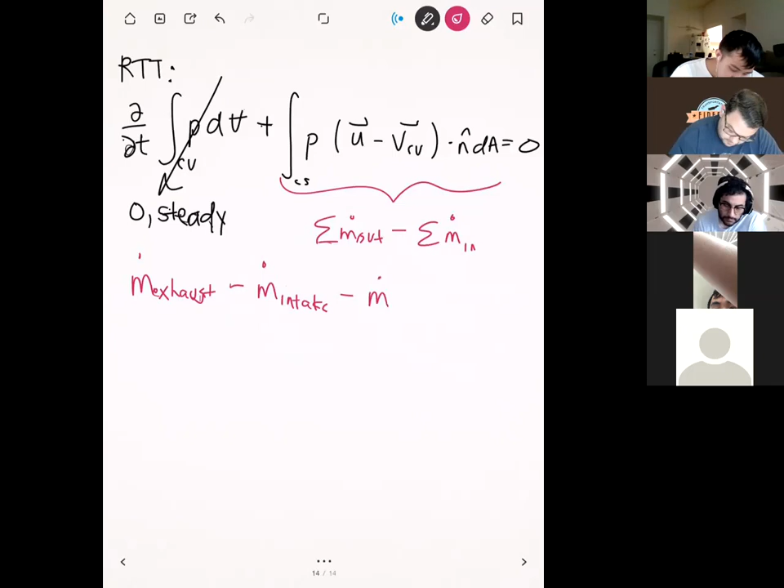And then from that, we're going to subtract the m dot of the fuel, which is ultimately what we're going to be solving for.

Since we have the statistics of the flow at the exhaust and the intake, let's put these in terms of those quantities. So m dot exhaust right here is going to be rho 2, A2, W2. In this case, it's going to be W2 because since we're doing a moving control volume problem, we have to use the relative velocities.

From that, we're going to subtract m dot intake, and then we're going to subtract the same things at the intake, or m dot fuel, sorry.

So the question now, we have the densities of the fluids at both cases, at both the intake and the exhaust, we have the areas. So now the question, and this is kind of the trickiest part to doing moving control volume problems, is what do we plug in for these relative velocities?

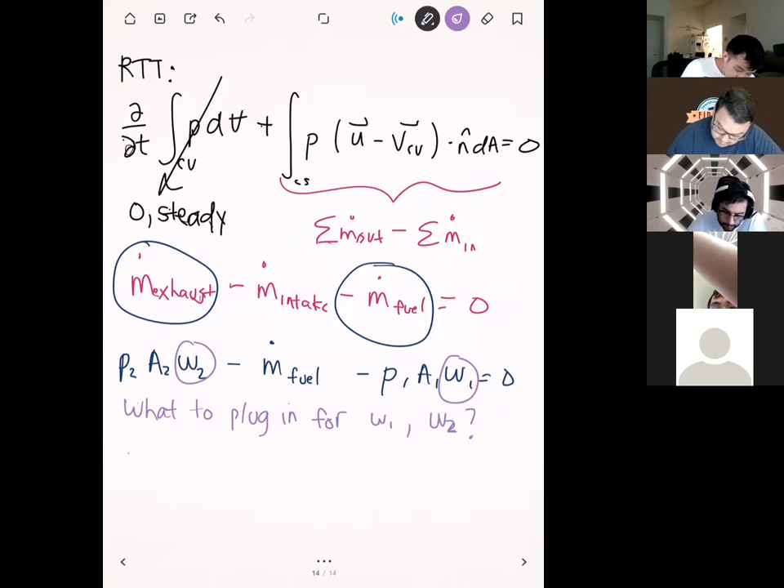Okay, so let's start with W1. W1 is the relative velocity of the fluid at the intake of the control volume. Let's go back to our figure right here.

It's not really stated here explicitly, but you remember what's happening is that this airplane is kind of flying through the air at this velocity of 971 kilometers per hour, and since it's moving, it's basically colliding with all the still air that's in front.

And so we didn't have a U1 right here because U1 is actually 0. Since U1 is equal to 0, we have still air, then what's basically happening is that this control volume is basically colliding with still air right then.

So even though the air itself doesn't have any velocity yet, the fact that our control volume is kind of colliding with that air, it's like we have an inflow velocity, because our control volume is kind of like Pac-Man, right?

Pac-Man kind of goes like this and eats all the little food in the game, right? So the food itself is not moving, but Pac-Man himself is moving. So it's like there's an inflow of food going into Pac-Man. And this is kind of the same thing right here. So even though the air in front is not technically moving, it's still air, the fact that we're kind of sprinting really fast and moving really fast into that air has to come into our control volume.

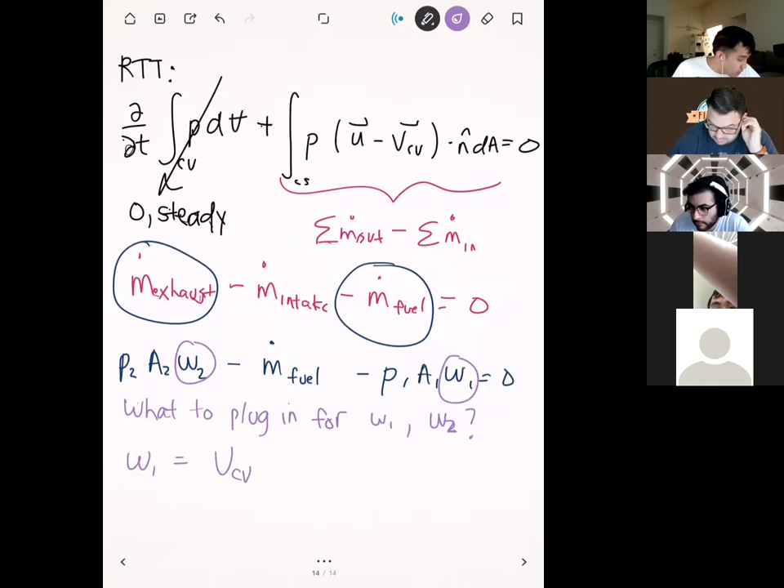That's basically the case here. So since U1 right here, W1 is simply going to be the velocity of the control volume, and this is going to be 971 kilometers per hour.

And so if you want to plug in the numbers for this, we know that W1 is equal to U1 minus V_CV. And U1 is equal to 0, so we just have a minus V_CV. But since the velocity of the control volume is going to the left...

And we have the positive x-axis that usually goes to the right here, okay? Then we're going to plug in a minus 971 kilometers per hour, and so that gives us a positive 971 kilometers per hour, okay?

I think the most confusing thing for these moving control volume problems is going to be the signs. You have to be diligent when applying this formula: velocity of the fluid minus velocity of the control volume. You have to make sure that the velocity of the control volume respects the positive x-axis for whatever you're working with. So in this case, we have 0 minus VCV, but since VCV was negative, we have two negatives that cancel out, and we get a positive 971 kilometers per hour.

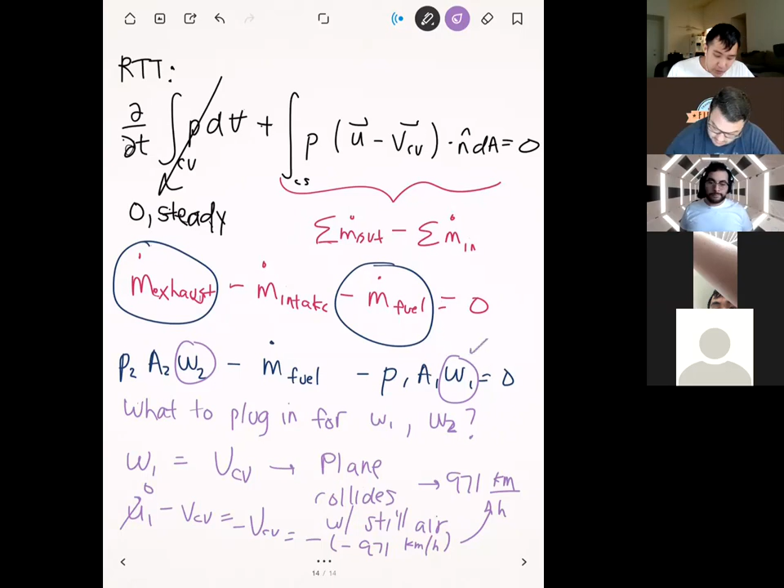Okay, so that's W1, so we can go ahead and plug this guy in. And let's compute W2. W2 is just going to be the same thing.

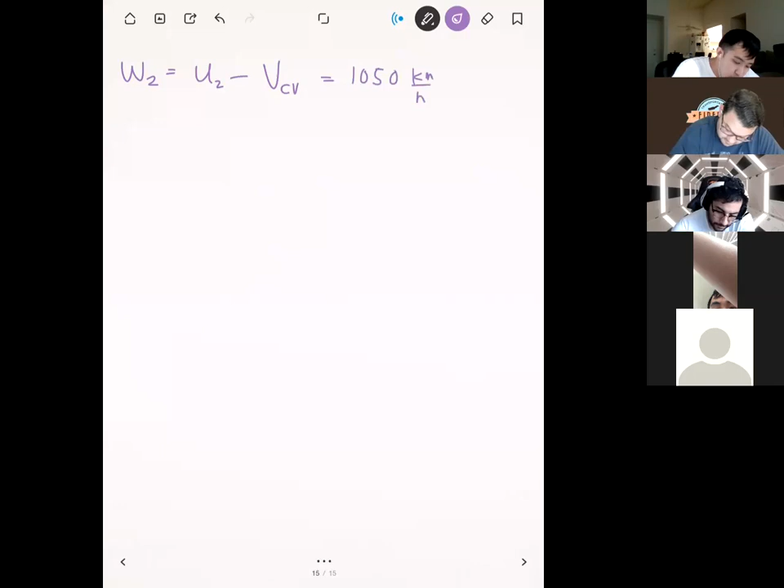So we have U2 minus VCV, and we know U2 from the problem. So U2 from a fixed reference frame is going to be 1050 kilometers per hour. And then the same thing, we're just going to subtract a negative 971 kilometers per hour. So if we just perform that arithmetic, we get W2 is equal to 2021 kilometers per hour.

And so now that we have W1 and W2, we can compute m dot fuel. Go back to our previous expression: m dot fuel is equal to rho 2 A2 W2 minus rho 1 A1 W1. We plug all that in and we get 9,100 kilograms per hour.

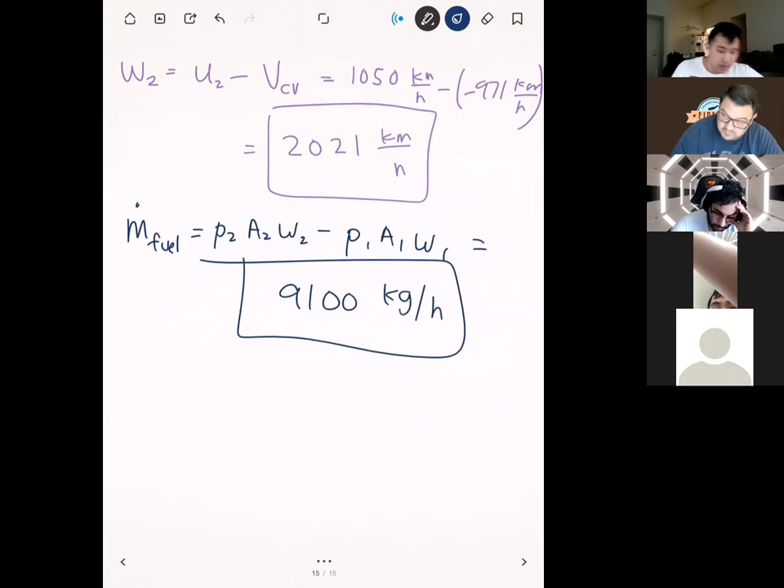But there's one thing I want to address because I know that when you guys look at this problem again, there's going to be some questions on this. So let's say, but wait, we have to think of the sign of U2 right here. I think the question is always going to be, what do we choose for the signs for all of these velocities?

And so we know that VCV is always going to respect the sign conventions, and U2 is also going to respect that same thing. So you want to make sure that you pick a sign for U2 that respects that direction. So that's what you would think, right? But this is U2 and U1.

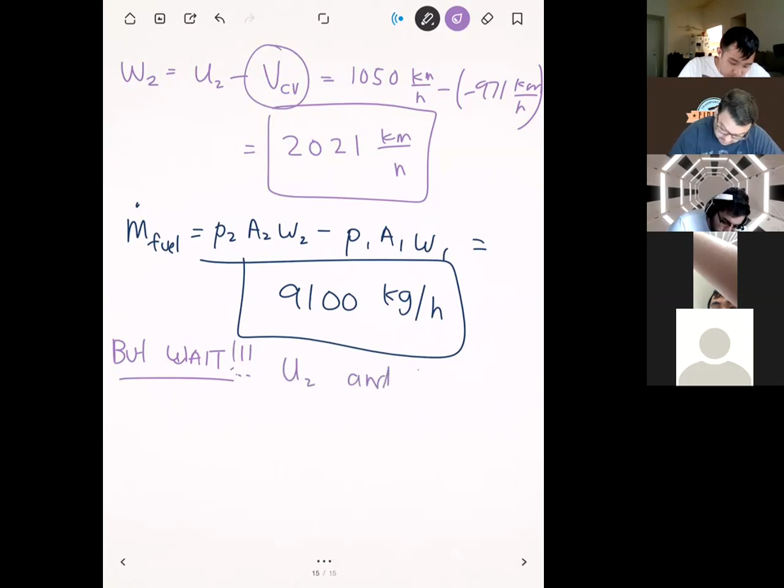And so the sign that you pick for U1 and U2 doesn't respect the positive x-axis as we usually do. Remember, the sign that you pick for U1, U2, the way that you pick that is whether it's going to be an inflow or an outflow.

And so in this particular problem, U2 was going to the right, which is positive x, so in this case they lined up. But especially once we get to momentum, we're going to look at cases where the sign that you choose for U2 is going to be critically important for the problem. In those cases, you just have to respect the fact that it's an inflow or an outflow, and that's how you pick the sign. So in this case, we picked a positive sign for U2 because it was an outflow to our system, and it just so happened that it was also in the positive x direction.

But I want to mention it today so that once we start doing momentum on Wednesday, you'll remember this kind of thing. So we're going to have to play with the signs quite a bit, and the signs are by far the most confusing things about these problems. Any final questions on this?